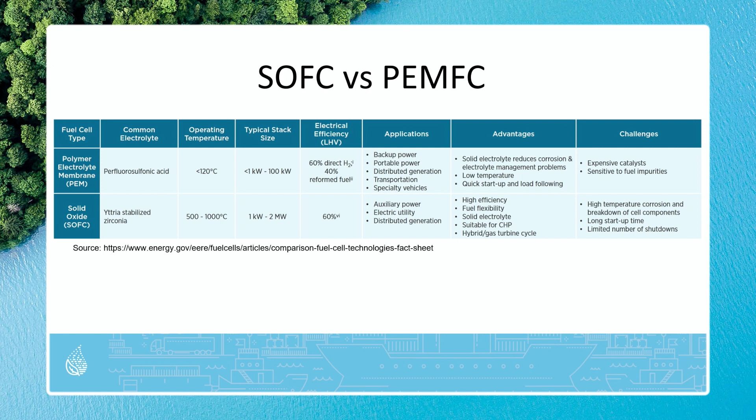So we decided on a Viessmann fuel cell, and let's come to the overview, which you can see here. Since Viessmann is a provider for literally every part we may need, we decided not to mismatch the parts and get everything from Viessmann. So we have here the fuel cell from Viessmann. We have a gas condensing boiler from Viessmann, which gives an additional heating output.

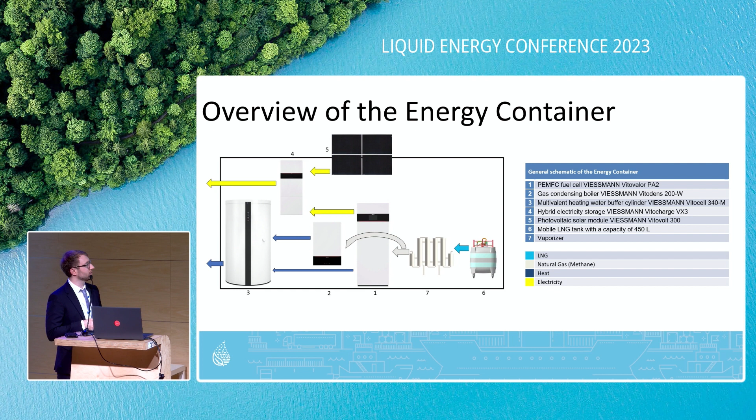And of course, some heat storage, which in this situation is the heating water cylinder from Viessmann, and also a battery for the times when the solar system is working, and also for the overproduction or general production of the fuel cell. And of course, it's powered by LNG, which is in a tank, which then goes into a vaporizer.

And here we have the tank, which then goes into the vaporizer, into a gas control system, which then divides into the gas condensing boiler and the fuel cell. And as you can see through the piping, it's quite chaotic. This is a multi-purpose cylinder. It has connections for the fresh water, for the heating of the fuel cell, and also for the heating circuit of the gas condensing boiler. And last but not least, here on the other side is the electrical department with the battery and the electrical compartment.

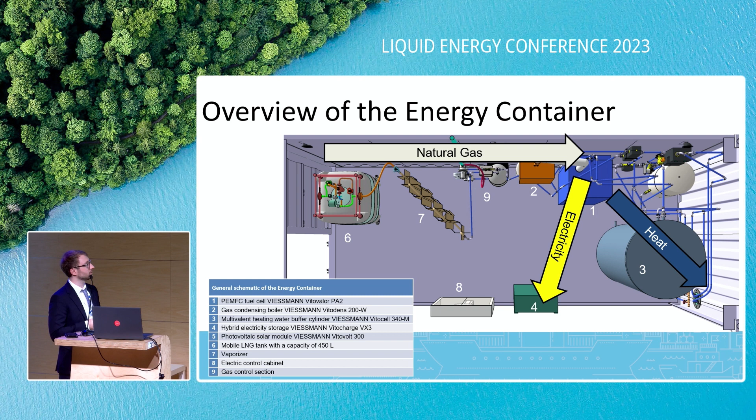Now a side view for the gas side. So here we have the tank, again, the vaporizer, the gas system, which I explain in a second. And here we have the boiler and the fuel cell. And also you can see here the vent for both sides.

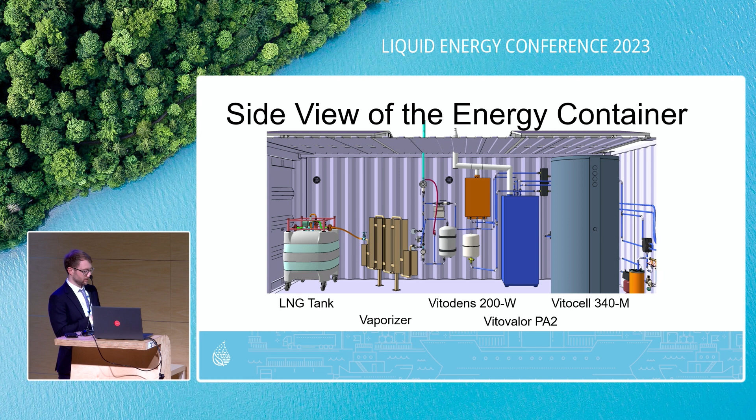There are quite some regulations for the handling of gas, which in Germany is the technical regulation for gas installations. And they declare that the gas for every gas installation needs to have special properties. In this type of environment, we need to have a gas which is around 0 degrees Celsius at least, and has a pressure of 20 to 25 millibars. And this is what this area is for.

Here we come directly from the vaporizer in a pressure equalizing tank, then in a first safety valve, and from the safety valve we go into a thermally activated shut-off valve, so in case of a fire the whole system can shut down. There's also another thermally activated shutdown valve directly on the fuel cell. Then we go into a gas filter, since as we've seen on one of the earlier slides, the PEM cells are quite sensitive to fuel impurities, so we need a gas filter.

Then we have two pressure gauges, one in front of the pressure regulator, this is the pressure regulator, and one behind it. From there we go into the second safety valve, which is set to 100 millibars, and then into a gas flow meter to actively measure how much gas is used. And then we have a split for the gas condensing boiler and the fuel cell.

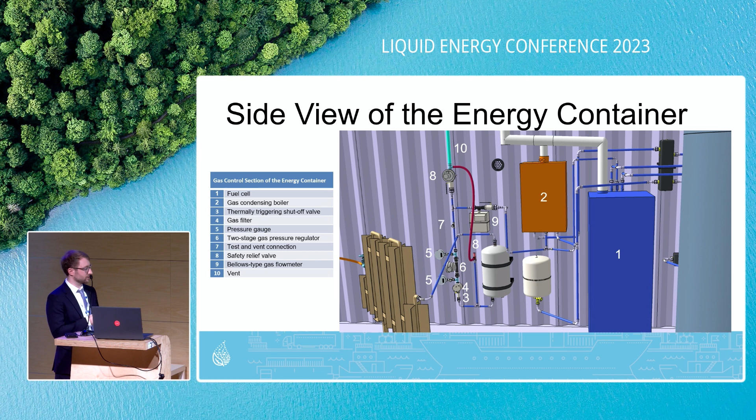Okay, now the heat circle. It's from the back view because it's in the back of the container. Here we have the water container or the water cylinder in the middle, and from here we have all the connections which are connected to the heat circuit module, which provides the circulation for the heating circle. So you see here the connection to the outside. So you just connect your heating circle for wherever it's needed to this connection, and you can use this part to actively pump the cold water and the hot water, to actively use the heating inside of the container.

There's also a hydraulic switch to control the hydraulic pressure, and these two tanks here also control the hydraulic pressure, because water at different temperatures can have different pressures. So for both systems, for the fuel cell and for the gas boiling system, we need two water equalizing pressure tanks. And on the left side, we have the freshwater input with a filtration system.

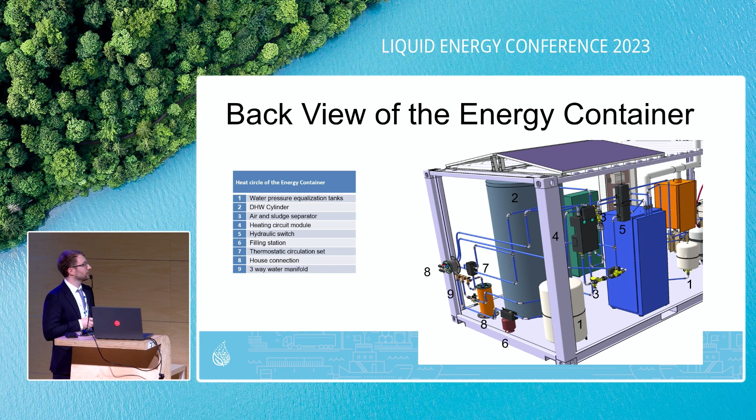I also have a different slide. No, that was the slide I just explained, sorry.

Here, with a filtration system for the incoming water. Here we have a water valve, and you see here the house connection or the general connection for water, for gas if you need extra gas, and for information, like an Ethernet cable for the monitoring of the whole system. And on the right side on the wall, we have the heating connections and for the hot water, which is also provided by this one here, the thermostatic circulation set, which can regulate the outgoing water temperature for fresh water or drinking water.

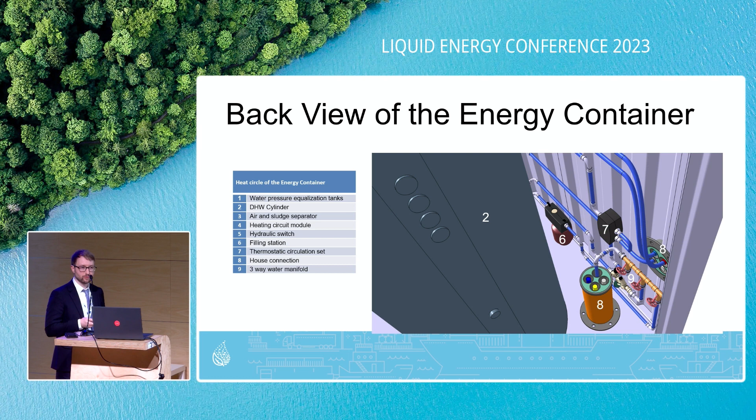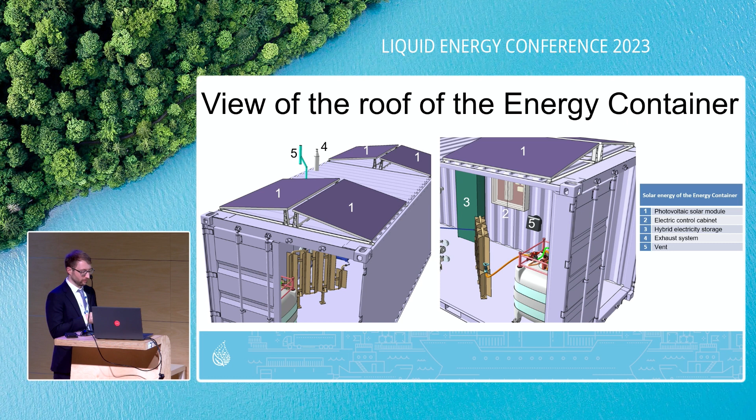Here is a general summary of the parts we used. The fuel cell has 0.71 kilowatts electrical power and 1 kilowatt thermal power. It's powered by methane. The additional gas condensing boiler, in case you need it, provides 19 kilowatts of thermal energy. The cylinder has 950 liters of internal storage for water, so you can store quite a lot of heat.

The photovoltaic modules each have 405 watt peak, which translates to 1620 watt peak for the whole system. It's mounted modularly on top, so you can either screw it or weight it down with concrete blocks, however you need it. And the electrical storage is quite big with 12 kilowatt hours.

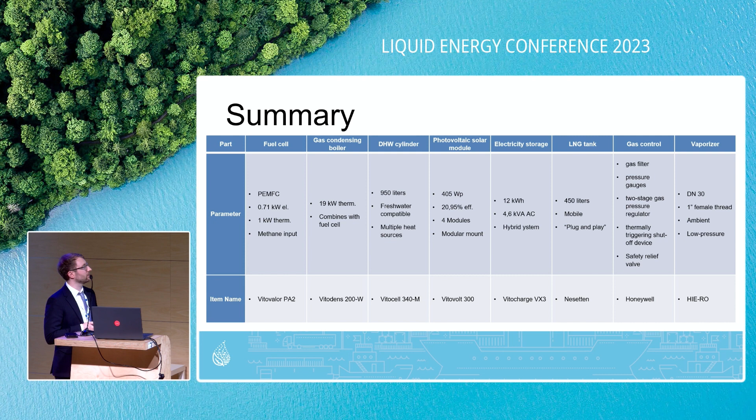It has an internal inverter, and it's a hybrid system, so it supports the input of the photovoltaic modules and the fuel cell. And as I already explained, we have a gas control system and a vaporizer also in the system. That was it for the gas container. Any questions?

Yes. Just a curious technical question. With the capacity of this gas container, if you attach it to a combustion engine, what production of electricity would be possible? The fuel cell needs around 0.2 cubic meters per hour, and our tank can fill up to 450 liters of LNG, and the ratio from LNG to gas is around 1 to 600. So let's say 1 liter of LNG is 600 liters of gas.

So if you translate that, what did we calculate? I think around 25 days. That's a highly concentrated form of energy, really. Also, it's because you don't run the fuel cell 24/7. You mostly run it for 12 or 13 hours a day, so that also expands the capacity a lot. Thank you.

So the first question, if I understand it correctly, is it possible to have variable parameters for electricity and heat? Because I understand that this microgrid produces heat and electric power. What has to be done, or is it just fixed as it is? If some potential end user would like a certain amount of electric power, does this end user have to decide in the beginning what mix of heat and power will be needed? This is the first question.

So this was the first concept of the refueling station. Here we still have only 2 tanks. In the later process, we found out that you can actually input 3 tanks, because in the beginning we also still had a big dispenser, which you may know from your local LNG provider, these huge dispensing stations. We thought about putting them inside the car, but as we found out, they are way too heavy for our car, because we want to stay inside the limitations of the 3.5 tons.

So we had to design the dispenser system ourselves, and also get more or less rid of the big drum hose, which also reduced the weight a lot, and also opened more space for another tank. And here you also see an air compressor and a cryogenic pump. The air compressor is actually one of the most important parts of the system, because the cryogenic pump is operated by compressed air. And also for the fueling process, you most often need compressed air to clean the residual ice of any receptacle or the cryogenic coupling. And also a battery to power the whole system, which is also powered by a solar panel on the top.

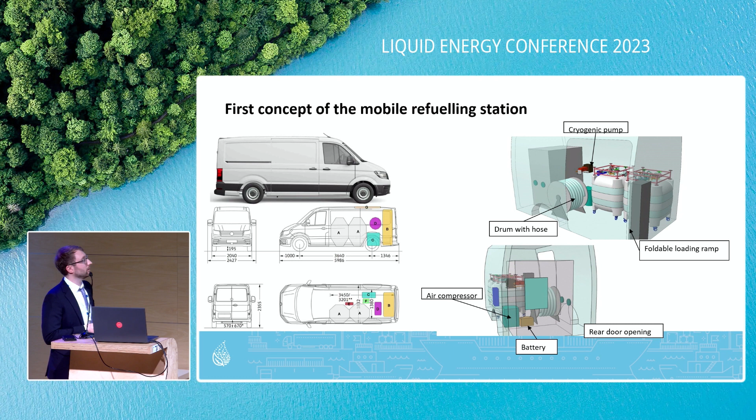Now, we decided on a VW Crafter from Volkswagen, which has a payload of about 1.3 tons, which we found in our research is one of the bigger payloads. And the 3.5 tons enables us to have the car driven with a standard license, so everyone can drive the car. And the high roof actually also enables us to have a bigger capacity tank of about 450 liters that can be loaded. And we can thus also equip the unloading equipment, also the dispenser, and also the electrical and compressed air equipment on the side or on the walls of the Crafter.

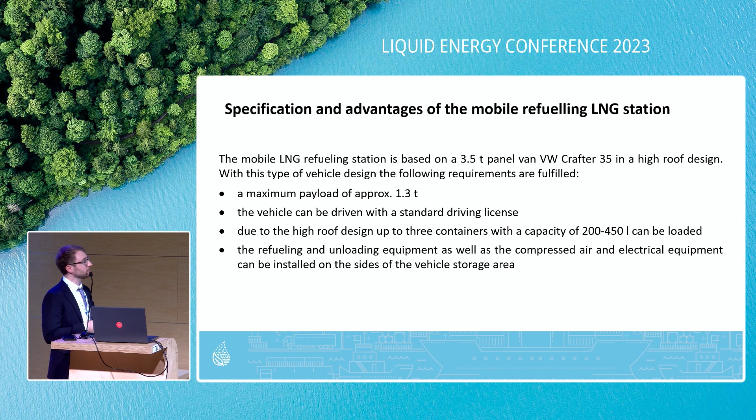Inside we have, of course, the tank plus a loading support with a winch, because the tank, although it's mobile, can be quite heavy to handle with only one person, so we have installed a winch to help the loading and unloading process. And also, of course, the dispensing system with hoses and the quick coupling, the compressor for the compressed air, and a safety system with a gas detector and a safety shut-off, so the whole electric system can shut down, and the solar modules and an accumulator for the power supply.

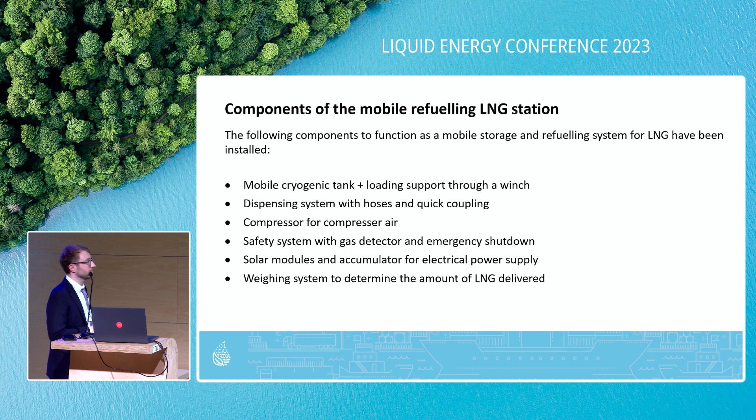And of course, you somehow have to measure how much LNG you have loaded or unloaded. There we have designed a weighing system below the actual tank. So we do not use the normal flow meters. We use a weighing system for the actual tank. Here an overview of the car, which you can also see outside later. Here we have installed the tank in the middle with safety belts for safety. It's connected with two hoses, but I come to that later.

Here on the right side we have the compressed air compartment, the electrical compartment. Here's the control panel, which controls every part in the car, but I'll also explain it a little bit later. Here you see the standard nozzle for the coupling. And of course on the left side is the dispensing system with a pump and activated valves. And in the back you see also the ramp and here the winch for the unloading and loading process of the tank, which could also be loaded to the side, but mostly it's to the back.

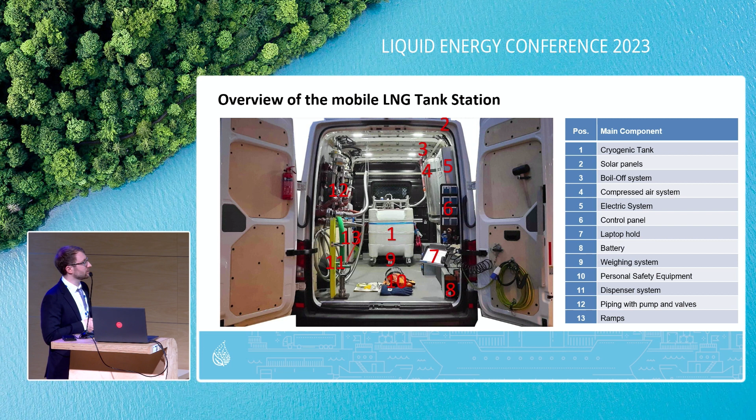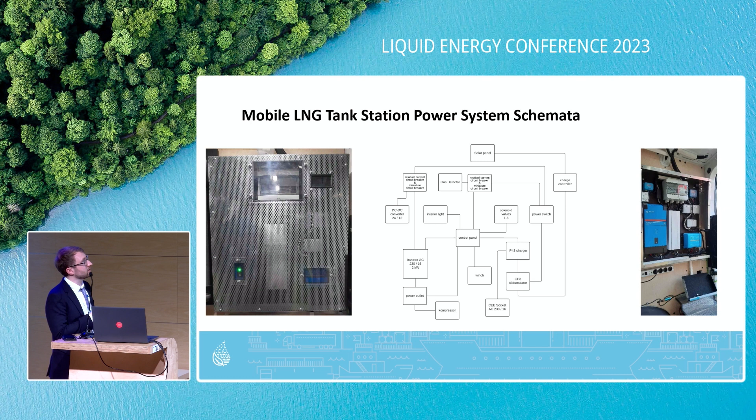Here is our energy scheme. You see everything is connected to the control panel. We have an inverter to provide power for the compressor from the solar panels, which is also monitored by a solar charge system, and also the battery can be monitored by an app, so that you always know how much is left in the battery. And of course we have some residual current circuit breakers and normal circuit breakers in the energy system, which are located around here. And the gas detector is actually right here.

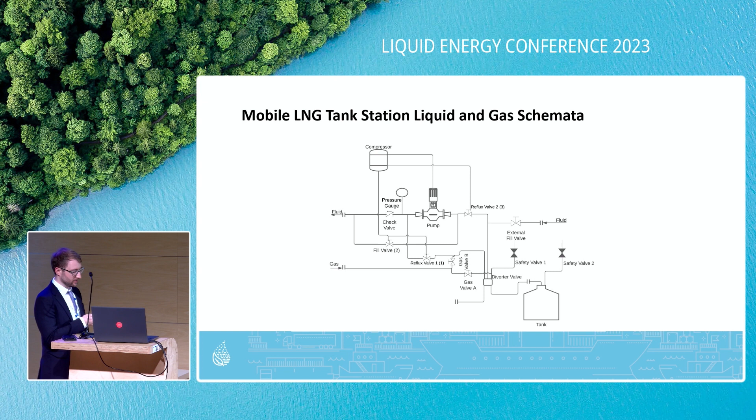And now we come to the control panel, which actually controls the whole car. We have at the top the control for the winch and for the energy. This red switch is the power on and the safety shut off. So you activate the safety shut off, and then you press this button, and then you can use the energy inside the car. The second row is for the actuated valves, and the third row is for the winch and a light panel for the inside light.

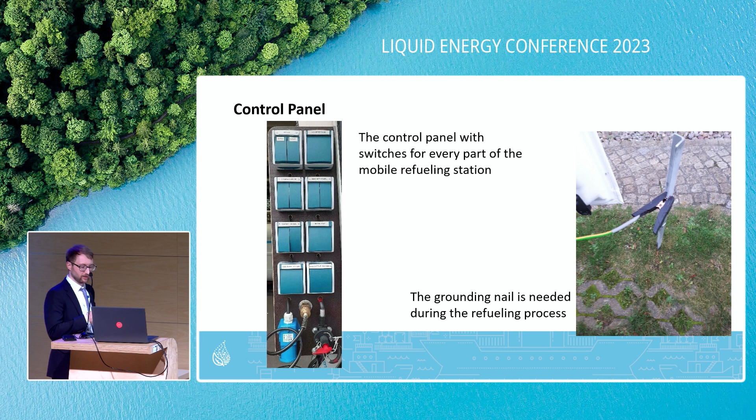And last is for the compressor, and in the winter times, you may have to support the battery because you have no sun. So you have to plug some power source into here and press this button to load the battery externally. And of course, you also have to use the grounding nail to ground the whole car during the loading process as a safety measurement.

How do you actually operate the tank, or the cryogenic vessel? The tank is situated, as you see, above the weighing system. It's secured with 3 safety belts, and the wheels themselves can also be locked in place as another safety measurement. And since we have relatively short hoses for the vent connection and the fluid connection, they also provide some kind of stability to position the tank. Here a side view of the tank. You see that the tank is connected through flanges.

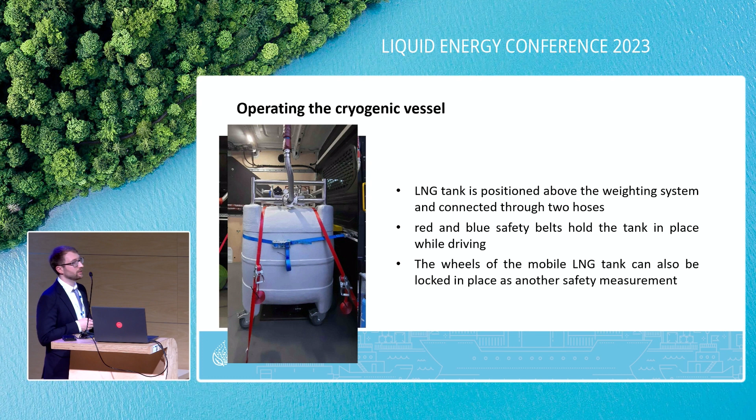Now, if you want to operate the compressed air, as I said in the beginning, you activate the energy system and then press this button to actually start the compressor. If you want to use the compressed air for measurement, you only need 2 bars inside the tanks. But if you want, for example, to clean your couplings, you need around 4 to 5 bars to have enough pressure on the air gun.

And for the process itself, you need to power at least up to 8 bar, because the pump is driven by the compressed air, and to convert the internal pressure of our tank, which is around 4 bars, to the normal pressure of 8 to 10 bars in the consumer tanks, we need at least 8 bar of pressure for the air-driven pump.

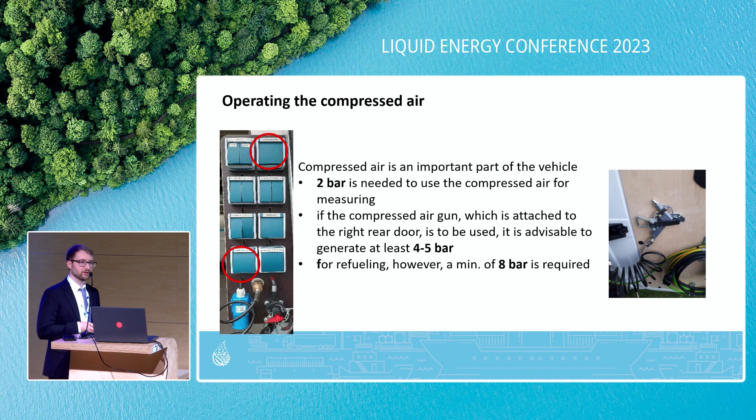And here you see the liquid hose, the liquid quick coupling and the vent quick coupling for the consumer tanks. This one is directly mounted on the car, and this one is held in place by a rubber, which looks funny, but it's actually quite durable. You can try it outside to rip it out. It will be quite hard to rip it out.

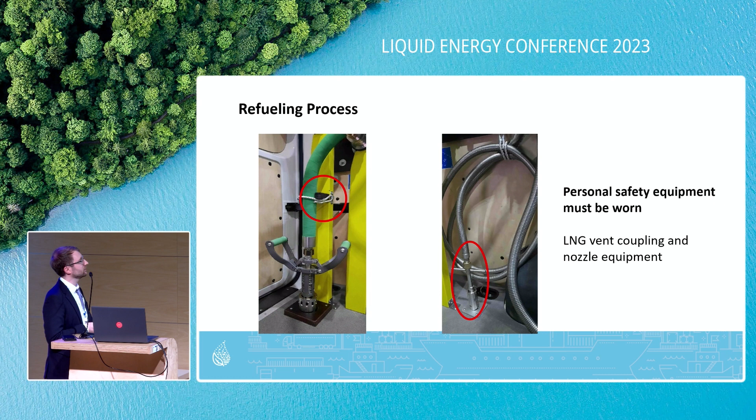And to actually start the process, we need, as I said, these 4 actuated valves. Number 1 and number 2 you need for the fueling process. And if you are done with the fueling, you activate number 3 and close 1 and 2. And of course, the pump is valve number 4.

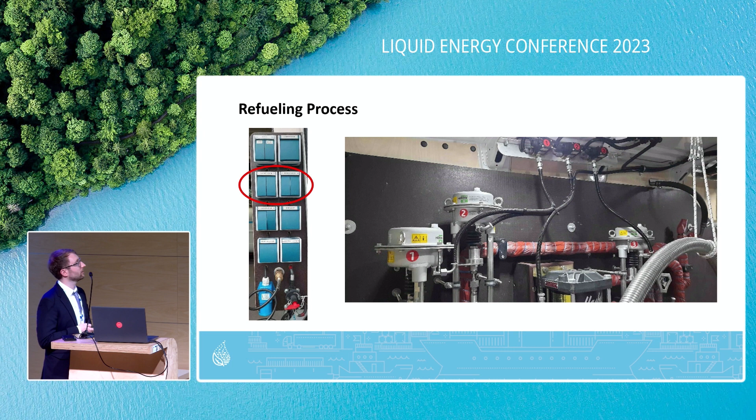And the measurement system: as I said in the beginning, the tank is directly mounted above 4 pads. So you move the tank up and down to completely free the tank of any outside influence, and then you measure the weight of the tank and directly know how much liquid you loaded or unloaded. And of course, don't forget, when you are done, to fasten the belts again.

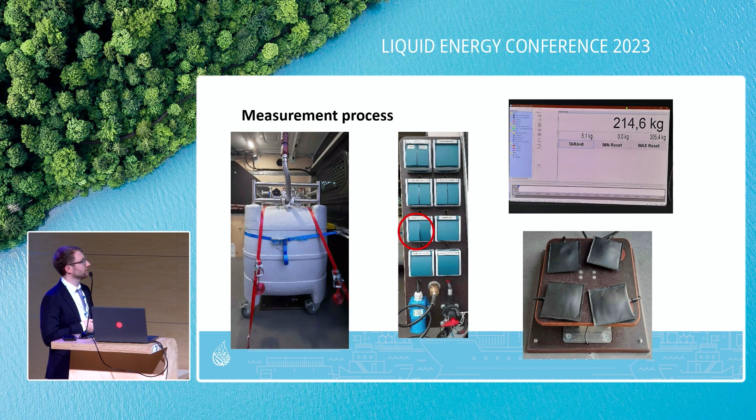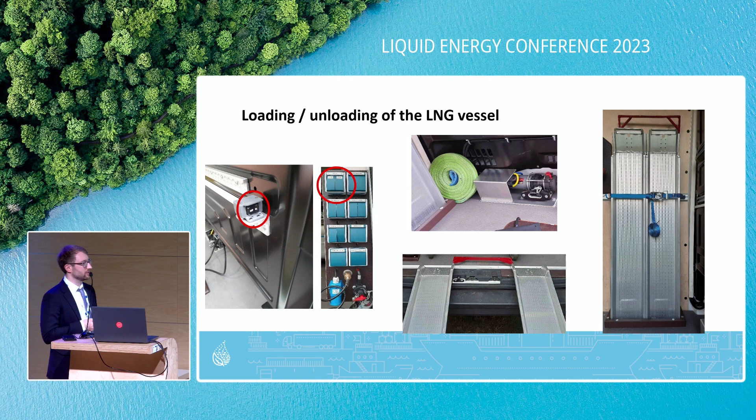And at last, our gas safety system. We have a gas detector that automatically detects gas when the system is turned on, so it only works when the system is turned on. And we also have a hand sensor, which you can use on any connection to check if the system is still airtight. And of course, as was asked for the container, we also have ventilation on the side and on the floor.